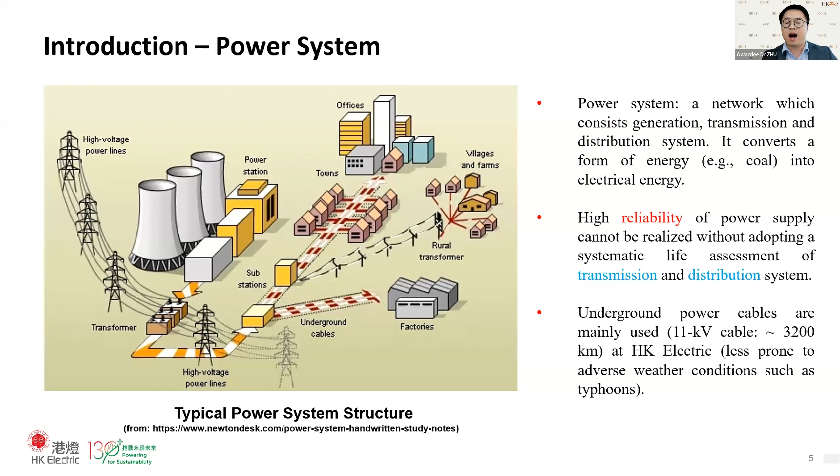So here is a summary of some defects that we observed in our underground cables. The cables may still experience tripping if defects occur. There are several defects, the following three shown here. The first one is water ingress due to poor water flow capacity. The second is water tree growth in the cable body. And the third one is, because these cables are overlaid underground together with other pipes, there can be damage.

Okay, so if there is damage, water can ingress and finally lead to a cable fault. So in order to evaluate this, there are several technologies used in this area in the power company.

Okay, so the first one is partial discharge. The principle is that when there is a dielectric breakdown of a small portion of electric insulation, together with a high voltage stress, the cable will generate partial discharge. In our system, we installed a high frequency custom current transformer to capture the signal.

The second one is the dielectric loss measurement. It measures the insulation level between the cable conductor and the sheath. If the dielectric loss increases in magnitude, the cable insulation degrades. Hong Kong Electric has used very low frequency testing to assess the cable condition for about 10 years.

The third one is very popular and easy, called insulation resistance measurement. It evaluates the insulation level between the cable sheath and the conductor. We conduct this test before cable commissioning. I recommend this one because it's very portable, using a megohmmeter, and very easy to carry. So what's the process of this measurement?

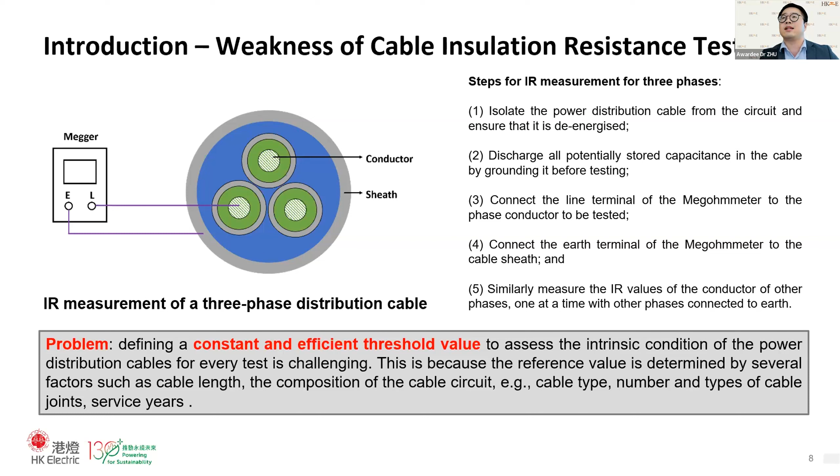So in order to tackle this problem, we propose a new concept called the IR imbalance degree, and I will introduce it in this part. First, there are some assumptions, which is why we can use the IR imbalance degree to evaluate the healthiness of the cable.

In principle, the IR measurement of three phases should be homogeneous if the cable is perfectly made and laid properly. That means the IR measurement for three phases should be identical. When a tiny defect originates, the insulation IR of that phase begins to decrease, and as the defect evolves, we can use the IR measurement of all phases to identify the healthiness of the cable.

So what's the equation for this? You can see the lower part of this slide, where we measure the average of the three-phase IR measurements. In the upper part we evaluate the deviation from one phase to the average. Suppose we have a very healthy cable and the three-phase IR measurement is balanced, so the value will be 0.

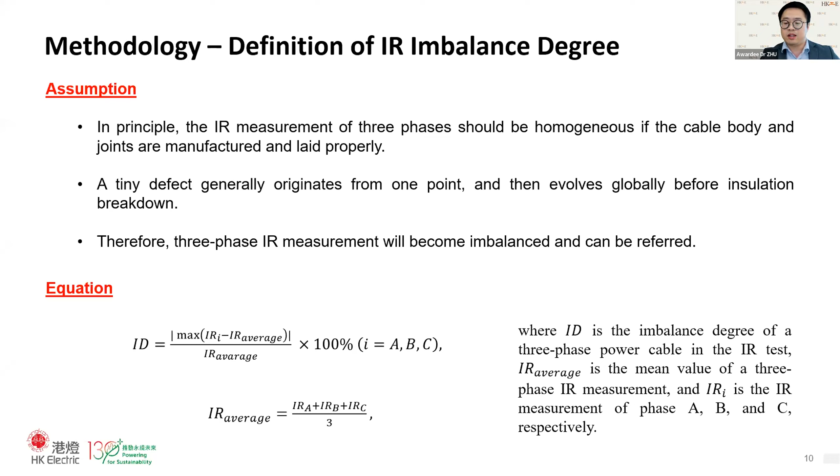So what will happen if one phase, two phases, or even all phases become degraded? Here is some mathematical derivation. In one phase, by looking at the equation, we assign different coefficients for the three phases. Supposing the three phases have a unit value and the coefficient for one phase begins to deviate, the value by calculation will reach 100%. With the same derivation, if you're interested you can look at my paper, the value actually reaches 200%.

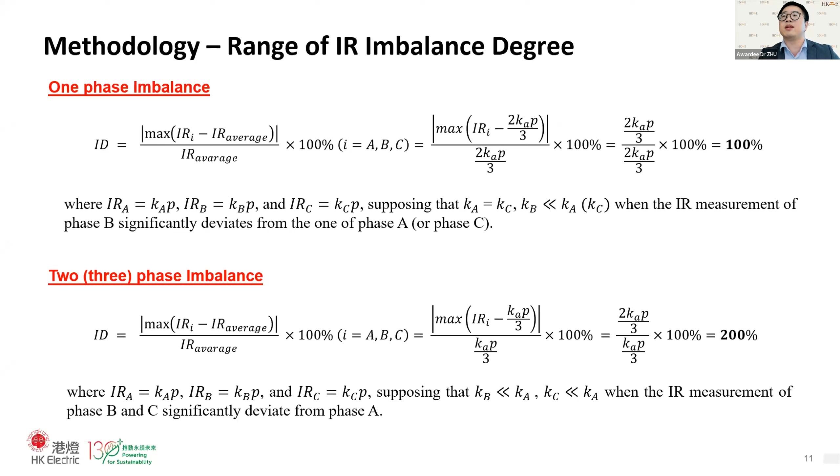So it states the cable condition — you can see the left part of my graph, which describes the IR imbalance derivation from a healthy cable to a one-phase imbalance, two-phase imbalance, and three-phase imbalance cases. So the IR imbalance value ranges from 0 to 100, and in the most serious case, to 200. This is the range of the IR imbalance degree.

In Hong Kong Electric, over the past 10 years we have about 5,700 testing records, and you can see the distribution. Most measurements are distributed under 100%, but there are rare cases locating between 100 and 200.

That is the severe case that we need to pay attention to. So actually, from this distribution, the question is how we can find the threshold of our IR imbalance degree for a cable series.

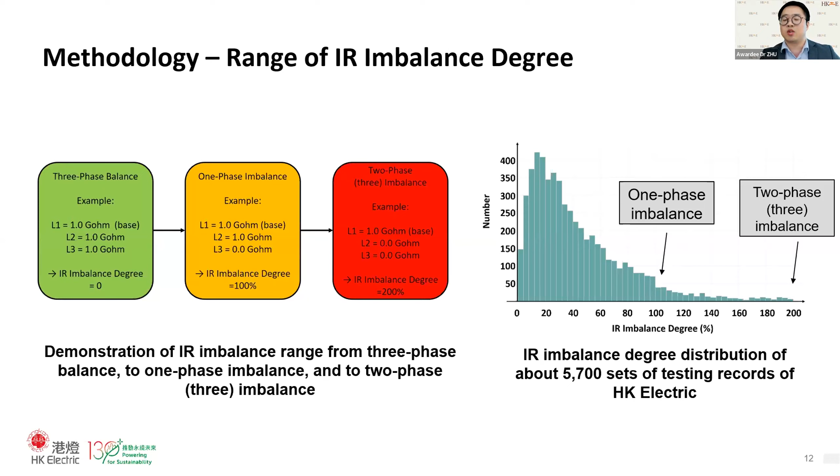Of course, you can use some mathematical method or some AI method to see the distribution of this graph. But for the easiest use of our engineers, we adopt the Pareto principle. If you are familiar with some physics, it describes that 80% of the consequences of this world are derived from 20% of the causes. So we set a very easy threshold for the criticality.

If you look at the right graph of this figure, it plots the number of tests and the distribution of an IR imbalance degree. When the cable becomes one-phase imbalanced, we need to pay serious attention. This is because phase-to-ground faults happen very frequently in our system. So we set the threshold from the deviation from 100 at 10% deviation.

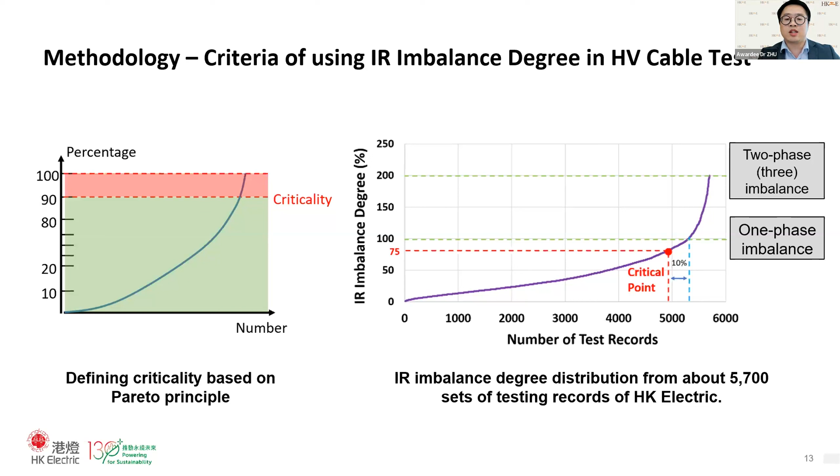We got the threshold should be 75%. Interestingly, we also look at the insulation resistance measurements, the absolute value of all the IR measurements. Because when an IR is smaller, the cable is more dangerous, we set the 10% threshold from the 0 value, and we got a threshold of 0.15 GOhm. These two criteria form a judgment on the right lower part of this slide.

So if the IR imbalance degree is larger than 75% and the IR measurement is less than 0.15 GOhm, the cable needs serious attention. If either of the two matches, the cable needs further advancement. If neither criteria is met, we don't have to take any action on the cable. So this is the criteria that we formed for the cable diagnosis in the IR measurement.

Will this method be effective? Let me give you some examples. The first one, but before that, let me give you some information about our underground cables because you may not be familiar with that. You can see there are two substations, and the cable is not overlaid strictly by a cable body directly. There can be different types of cable bodies, and there can be different numbers of cable joints.

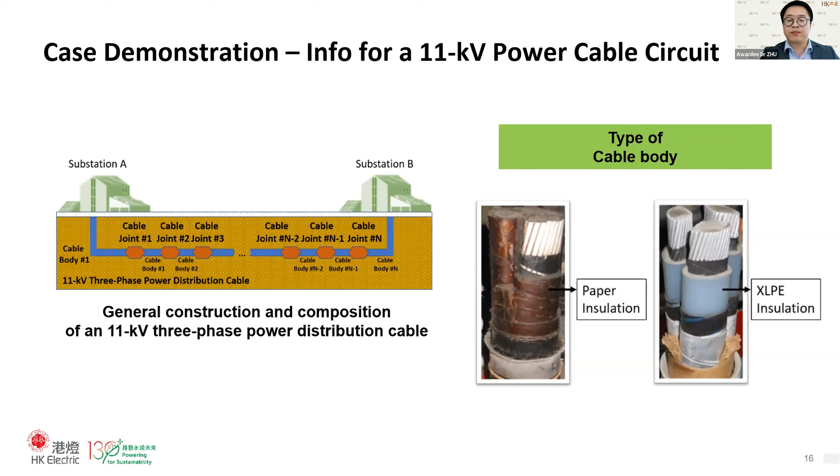This denotes that the cable needs very serious attention. So under this case, what is the follow-up action? Because the cable is very dangerous, we apply a voltage above the normal operating voltage to assess the cable situation in a prescribed manner over a set period. This is called a monitored withstand test. We apply two times the rated voltage and a 30-minute monitored withstand test on the cable.

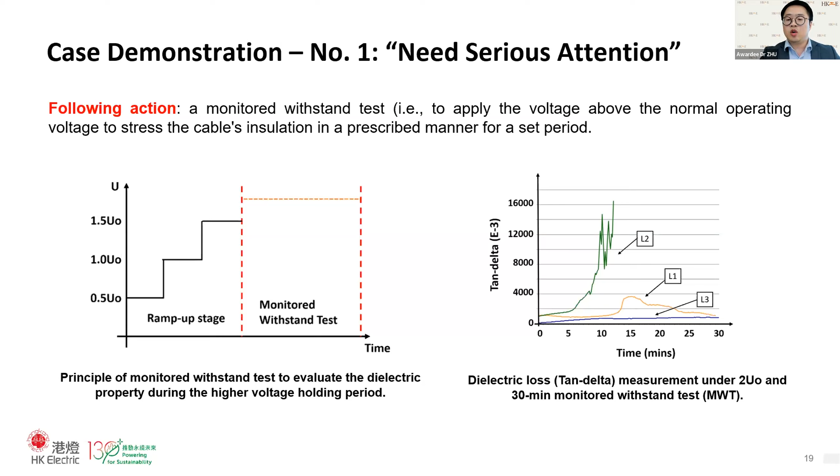We found that the cable's L2 phase failed during this test, which verifies that the cable is very weak. So we used the fault location method to explore the faults, and we returned the faulty component, finding that the cable had prolonged water ingress. From the signs observed, the outer jacket of the joint was found to be damaged on one side of the cable, which is why the IR imbalance for this cable is very weak. So this is the first case, demonstrating the effectiveness of our method in situation one.

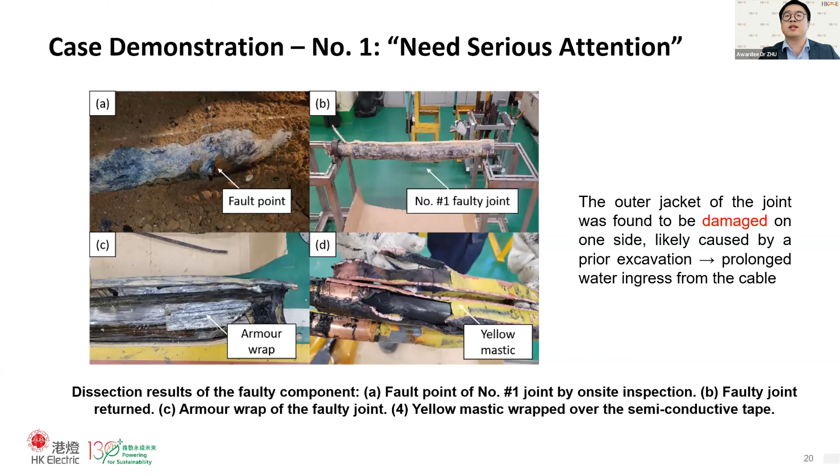And the second one, I would also like to give you, which deserves further study.

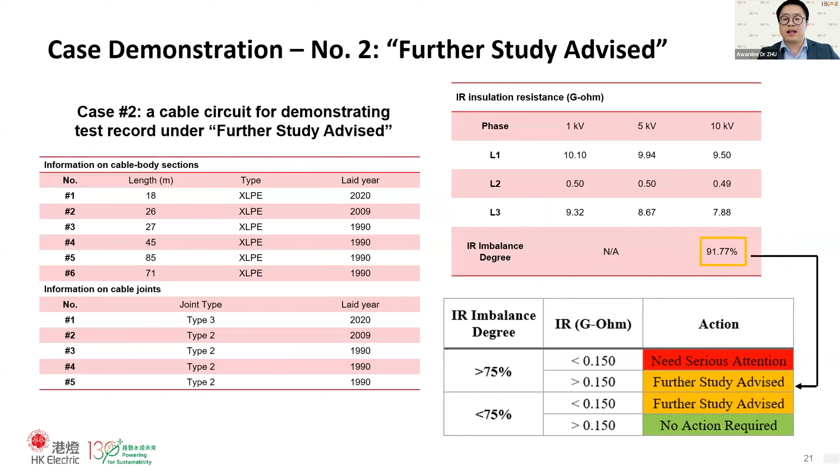So in the left part, you can see the demonstration, the setting of this cable, and also the IR imbalance on the right-hand side. The IR imbalance is actually very large, larger than 75%. By the same principle that we applied with the MWT test, the cable does not fail, so it means the cable is somewhat robust.

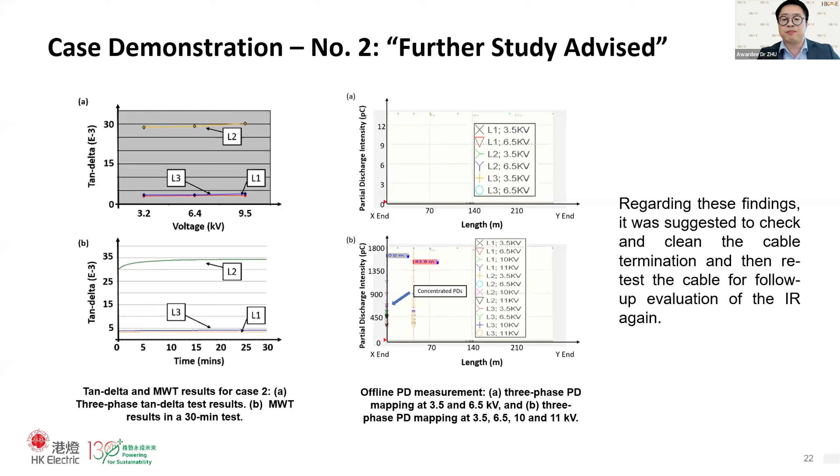But we wondered why the tan-delta measurements and the dielectric losses were imbalanced. So we also conducted a partial discharge mapping, and found at the termination of the cable that there was concentrated partial discharge. We checked and cleaned the cable termination, then did the IR imbalance again, and it became balanced. So this is the situation for the second case.

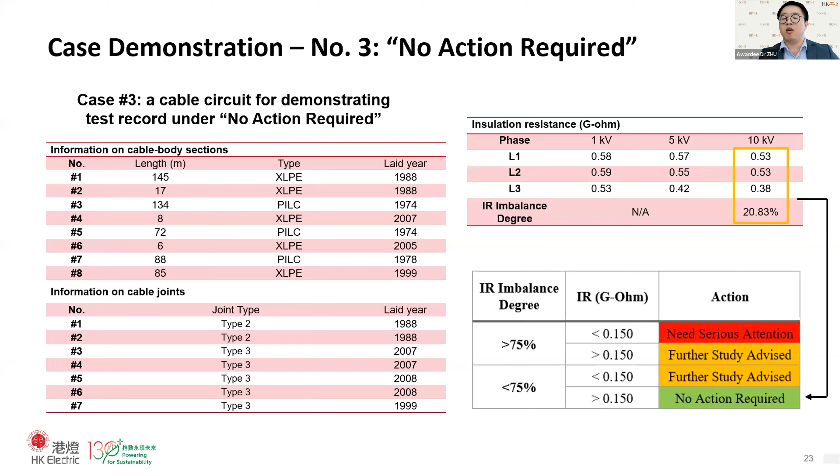So the last part is my conclusion. This paper introduced a new method for the condition assessment of medium voltage power distribution cables based on the conventional IR test, but with a new data analysis approach.

The second point is that, because there are hundreds and thousands of cables owned by our company, this measurement allows us to prioritize maintenance efforts for these cables.

The third point is that this method is not only for 11 kV power cables, but can also be applied to higher voltage cables. So this method can potentially be applied to other cables as well.

Last but not least, this improved inspection tolerance could further enhance the reliability and security of the Hong Kong electric power supply. So this is all my part, and thanks for your attention.

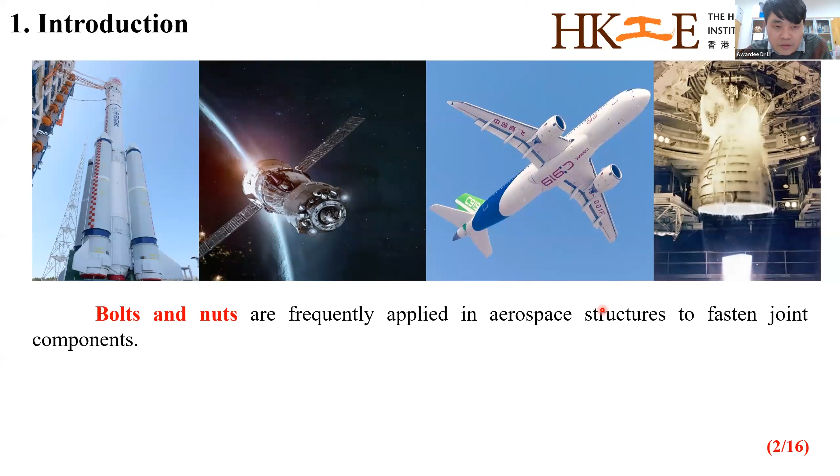As shown in the figures, for some aerospace engineering structures such as rockets, satellites, aircraft, and engines, bolts are frequently applied to fasten different components together. However, these bolted structures often encounter dynamic loads during service, such as vibration, shock, or thermal cycles, which in turn cause bolt loosening faults, affecting the smooth and normal operation of the structures. Therefore, it is very important and critical to use methods to diagnose bolt loosening faults in these structures, especially at their very initial stage.

For this objective, there are many methods based on vibration features. Today I would like to introduce the transmissibility function. According to the output responses used for the definition of TF, there are 3 main types of TF.

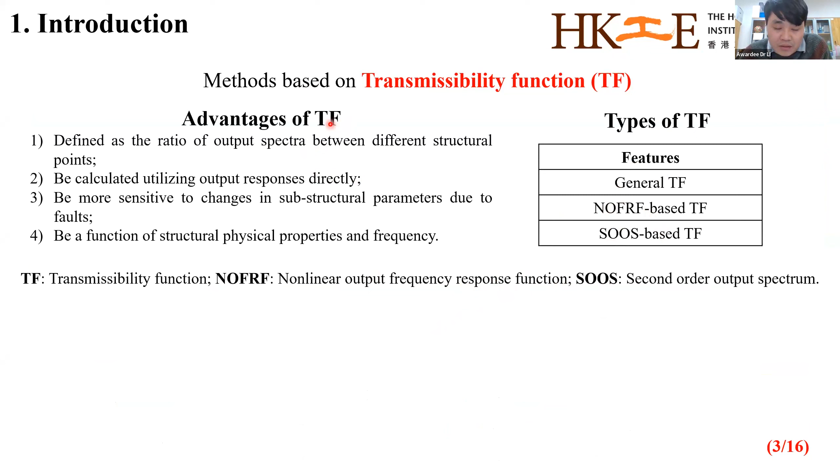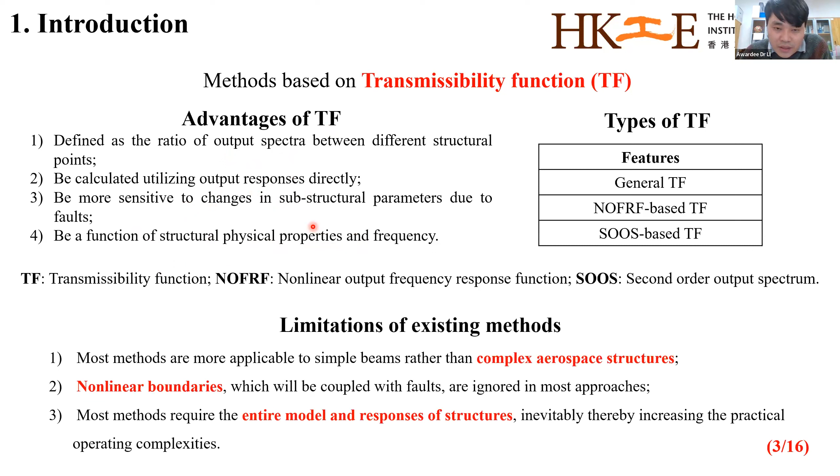Compared with other vibration features, TF has obvious advantages. Firstly, it is defined as the ratio of output spectrum, meaning there's no need to measure the input or identify model parameters. Secondly, since TF is just a function of the structural local parameters, it would be more sensitive to fault changes in structures.

However, existing methods still have some limitations. One is about the structure—most methods are more applicable to simple structures such as beam-like, frame-type, or grid-like structures, and consider little for complex aerospace structures. The second is about nonlinear boundaries, which are coupled with faults, but most methods ignore them. The last is about requiring an entire model and full data of the structure—most methods require reference data or a reference structure for damage diagnosis.

To overcome these limitations, we propose a novel method for complex aerostructures with nonlinear boundaries. We only consider the structure we care about, the structure to be diagnosed, and we don't use all the data from the whole structure. Actually, in real application, it is quite hard to know the parameters of the entire structure or to measure all output responses from the structure.

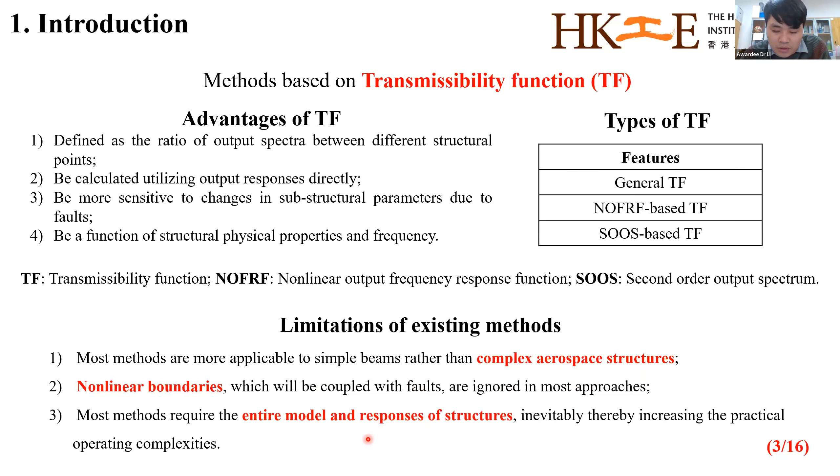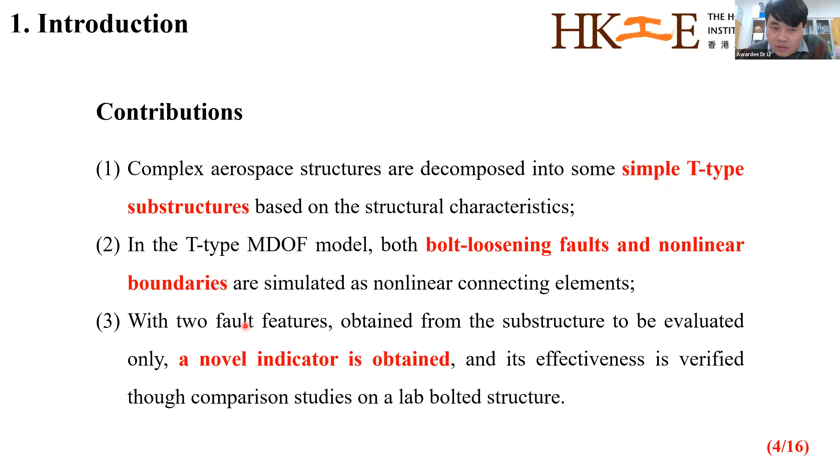In our method, we decompose the complex structures into a series of very simple T-type substructures to simplify the theoretical analysis and data processing. In the model or structure, we consider both loosening faults and nonlinear boundaries. We only use output responses from the T-type structures to be diagnosed to get two fault features and a novel indicator.

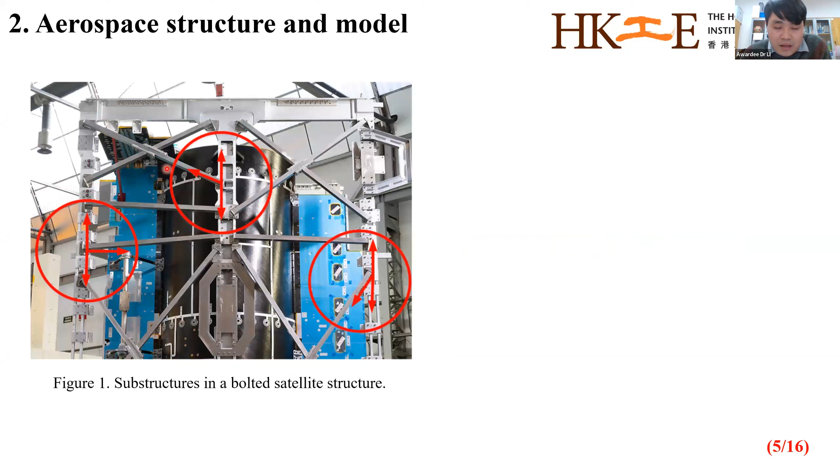As shown in the figure, it is a bolted satellite structure which is connected by some beams and bolts. As highlighted in the circle, we can find some T-type substructure, and we can also get its multi-degree of freedom model. This is the center mass, and these around mass are connected with the center mass with some spring and damper connection. In this model, we use the nonlinear connection to simulate the bolt loosening fault.

For this T-type structure, we can find many T-type structures in the entire structure, and we only consider the structure to be diagnosed. We will use these four output responses to decide whether there is a bolt loosening fault around mass mi.

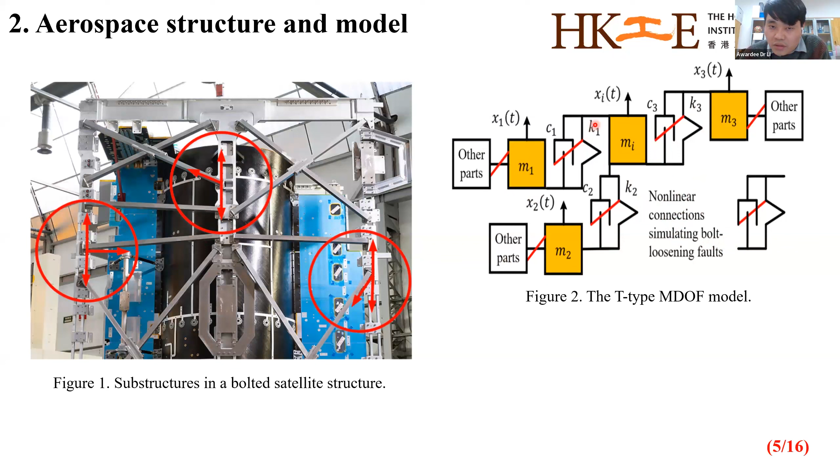Okay, then for the structure, we can get its differential equation of motion. This is the mass mi, and this is the acceleration, the velocity, and this is the displacement.

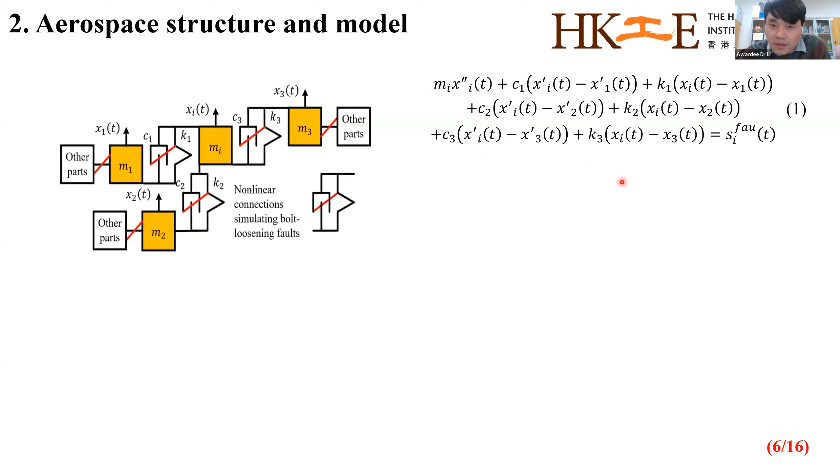C and K represent related damping and stiffness coefficients. This term represents the nonlinear force caused by bolt loosening faults in the structure. Actually, it has many forms, and we consider the common form, which is a polynomial function of related velocities and displacements. There are some explanations for some parameters.

Actually, this one is very important for our method, but we don't consider its detailed type. We consider its value. If there is no fault in the T-type substructure, then the related nonlinear force will be zero. On the contrary, if there is fault in the structure, this nonlinear force term will be non-zero. So we will use the value of the nonlinear force, zero or non-zero, to determine whether there is a fault in the substructure.

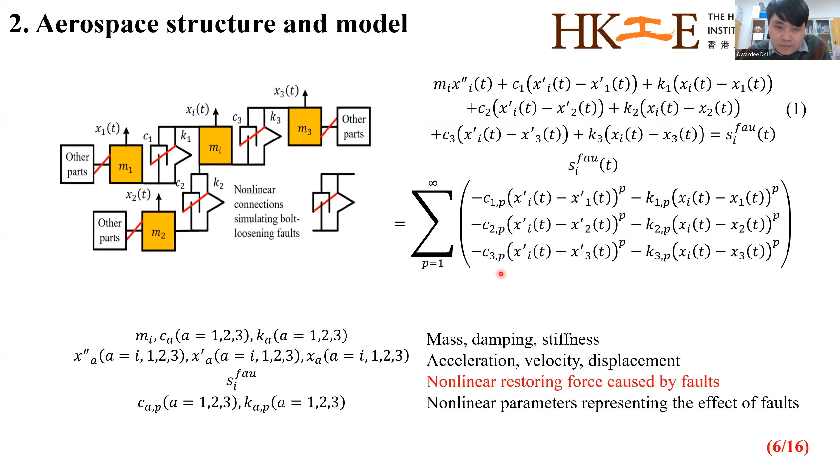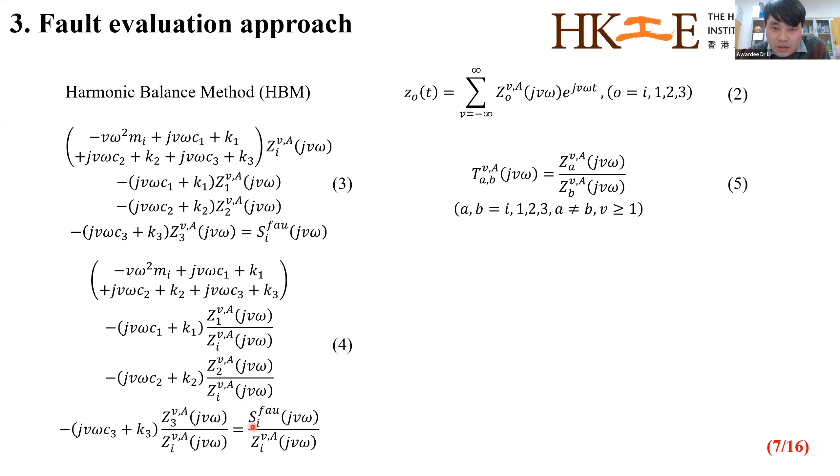Using the harmonic balance method, we can assume the nonlinear output responses of the structure and substitute these responses into the frequency domain equation of the differential equation. Then we can get the frequency domain equation, and with some operation and the definition of the transmissibility function, we can get a brand new equation.

These are structural parameters, and these are structural parameters, and these are transmissibility function. This is the nonlinear force, and this is the output spectrum.

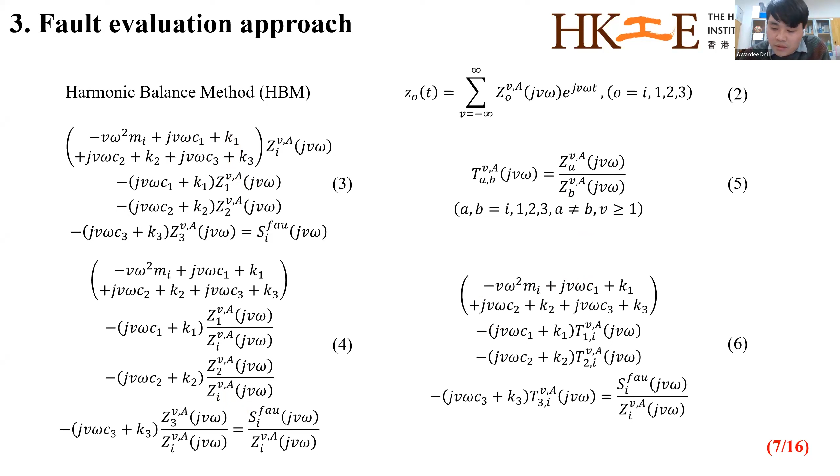Okay, we write the equation again, and then actually this equation alone cannot get the damage indicator. We found that the structure with the nonlinear boundary is a nonlinear system. So if we change the magnitude of the input excitation, then we can get...

Four equations similar to equation 6. And then if we extract three of them, we can get two groups of equations shown in equation 8. And with the inverse matrix, then we can get another equation.

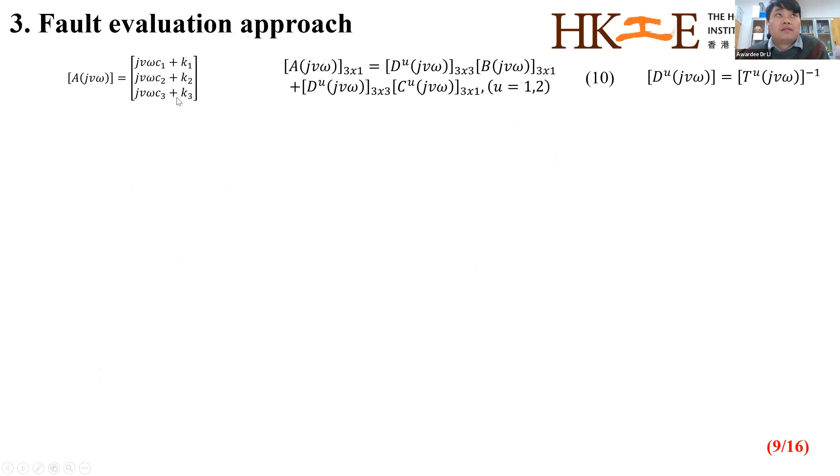And then, if u equals 1, then we can get one equation to calculate the second term and the third term. And with these two equations we will define one fault feature. Actually, this feature is defined as the ratio of these terms.

On the other hand, it can also be calculated by transmissibility functions. And similarly, if we use u equals 2, then we can get another fault feature. And with two fault features, we can get a novel damage indicator.

Okay, let's explain the basic principle. Here, if there is no fault in the structure, then related terms in these two vectors will be 0. Then the two fault features will have the same expression, which means the fault indicator will be 0. On the other hand, if there is fault in the structure, then the two fault features will have different expressions.

Then this in turn leads to a non-zero fault indicator, so we can complete the fault detection and localization based on the value of the fault indicator. On the other hand, we can find that these two fault features are calculated by these two terms. Actually, these are the elements from the matrix D, and it can be calculated from the transmissibility function matrix. This means in practical application, we can use the output responses to calculate the transmissibility function, then calculate the related elements D, and then obtain the fault features and fault indicator.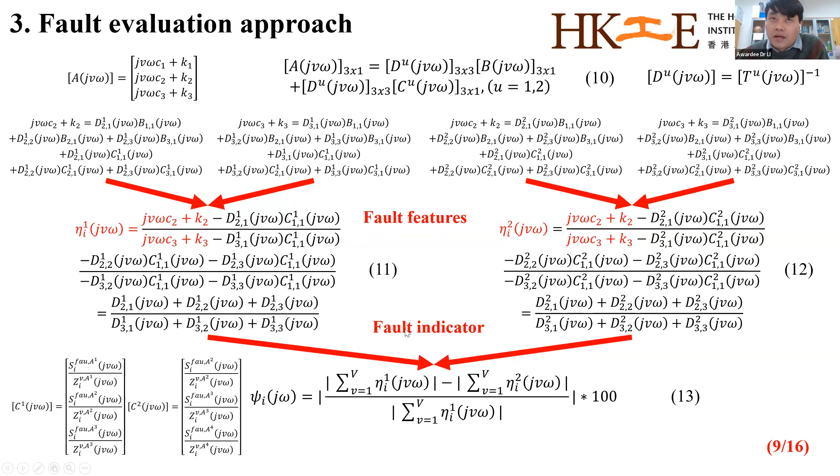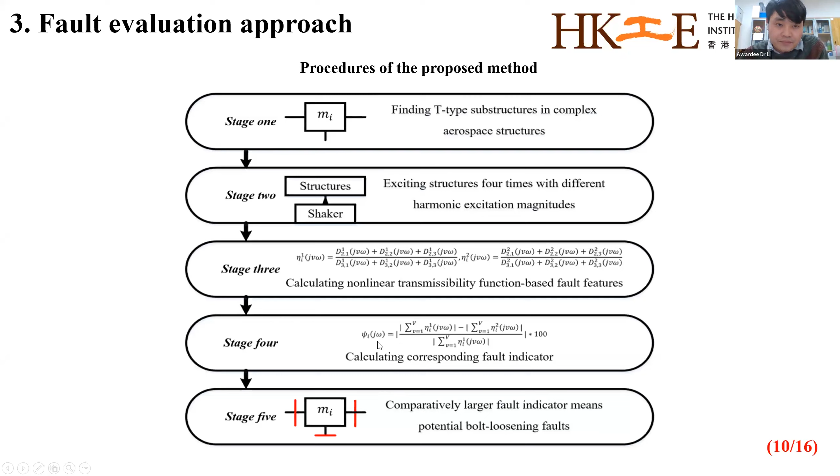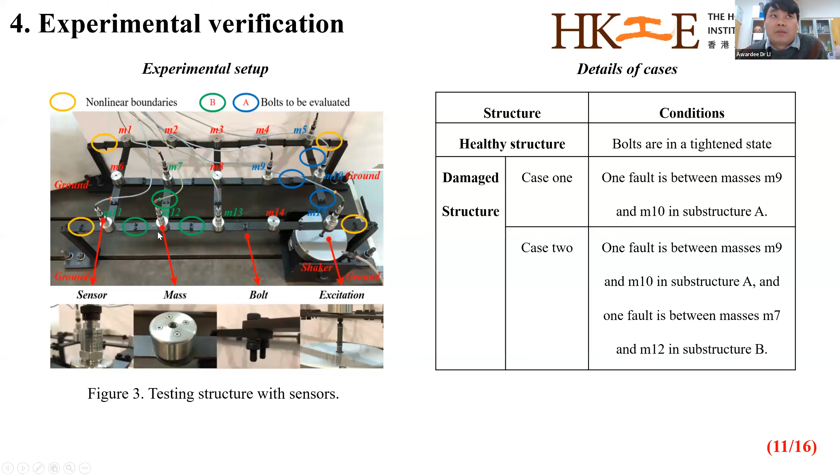In case 1, we find 2 T-type substructures in the structure, one here and one here. In case 1, there is one fault in T-type structure A, and in case 2, both T-type structures have bolts losing force. Let's check the result.

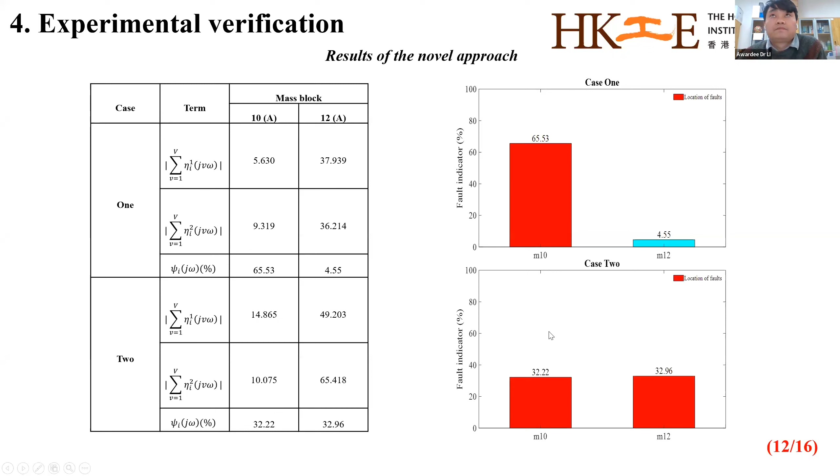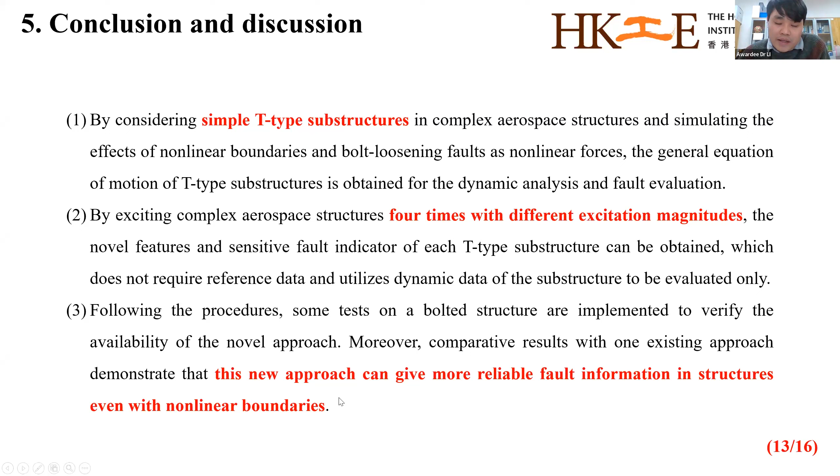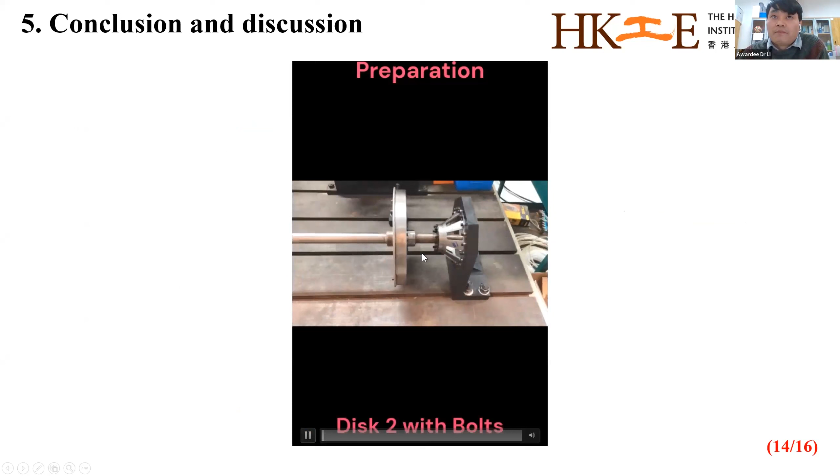For the extension of this structure, I will show you a video. This is a rotor to simulate a high pressure rotor in the aero engine, and it has one shaft and two disks.

This is the sensor, this is the support, and this is for the sensor setup.

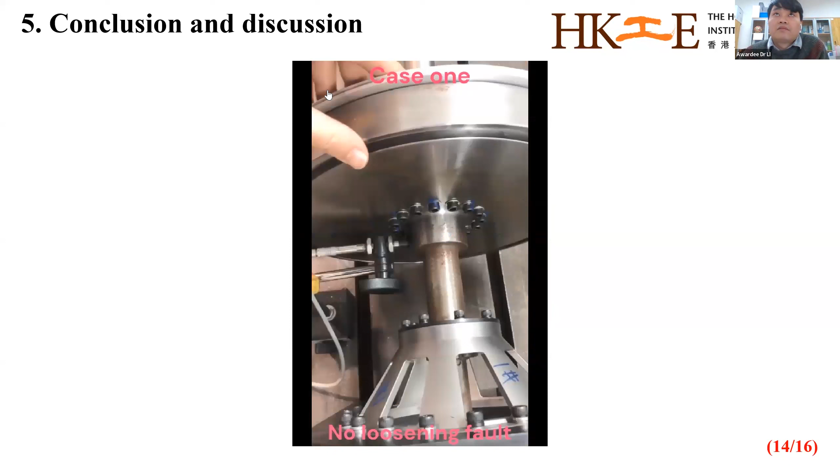In case one, there is no bolt loosening fault. Then we will collect the data for the following process.

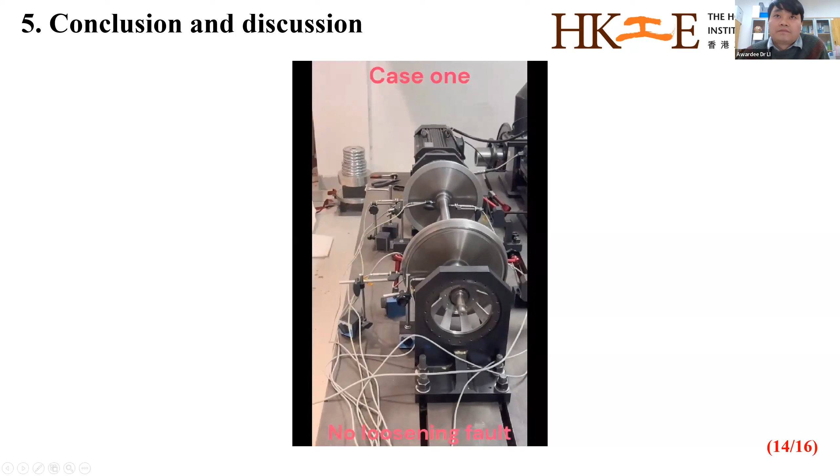In case two, this one has some bolt loosening fault. Then we will run the rotor and collect the related data.

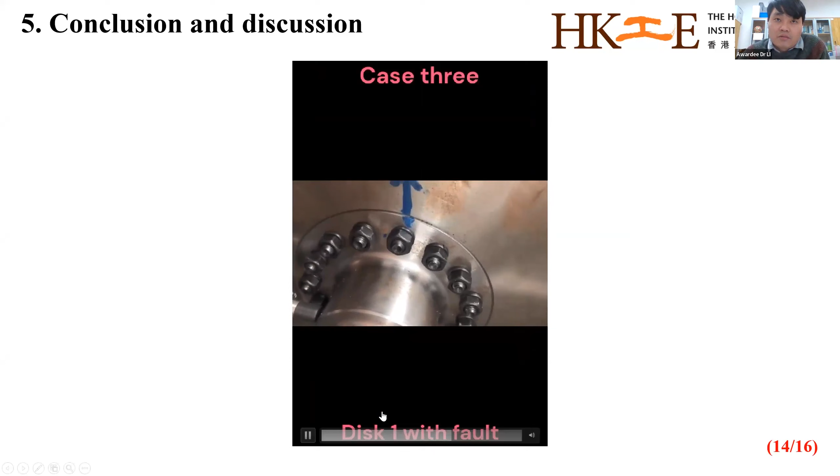In case three, we consider a more complex situation. This one has some bolt loosening fault, similar to that in case two.

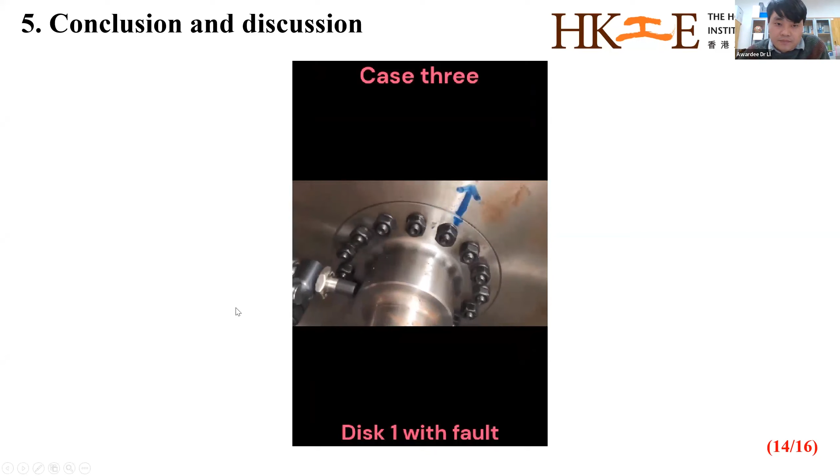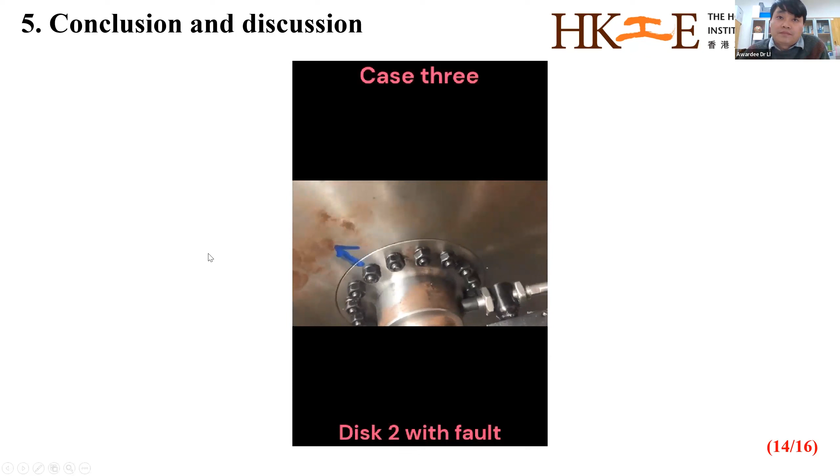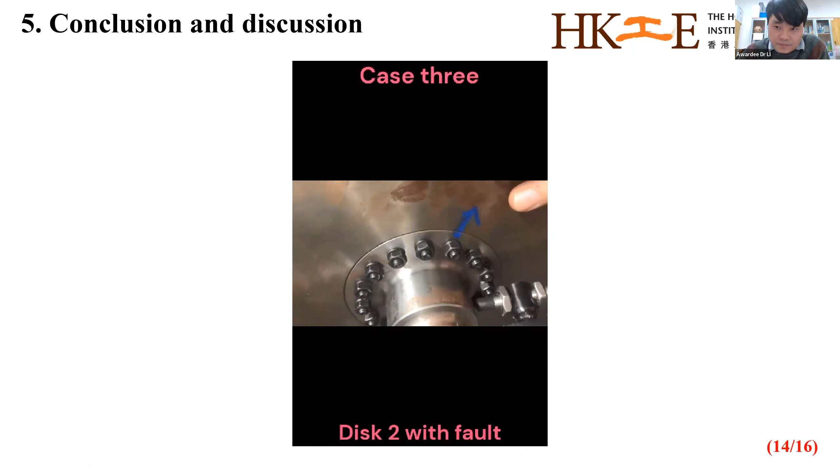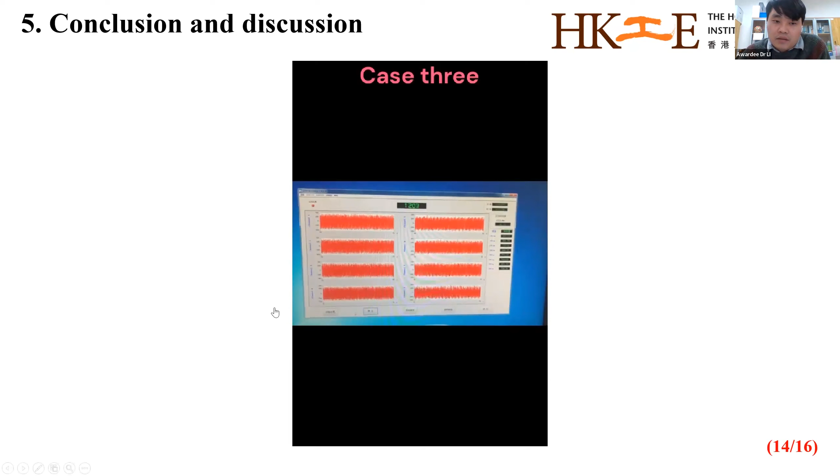Apart from that, this one also has some bolt loosening fault. We need to collect the data again and calculate the fault indicator to decide the location of the bolt loosening fault.

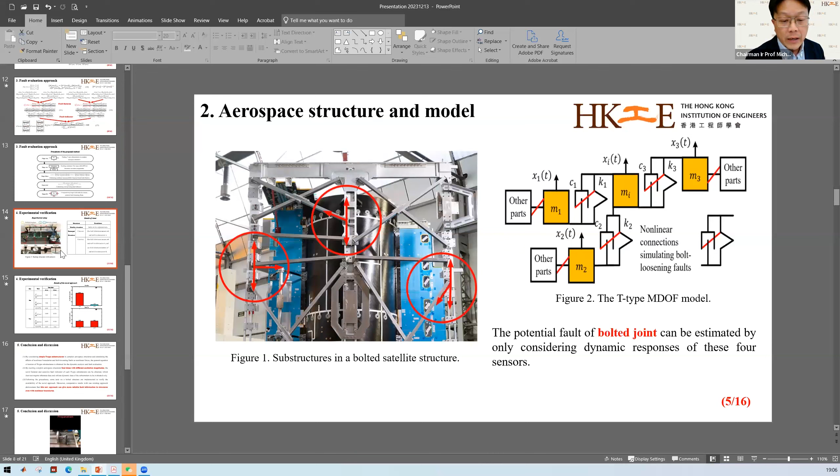Okay, maybe I have one question. In your experimental setup, you show that you test the joint, based on a rotating shaft.

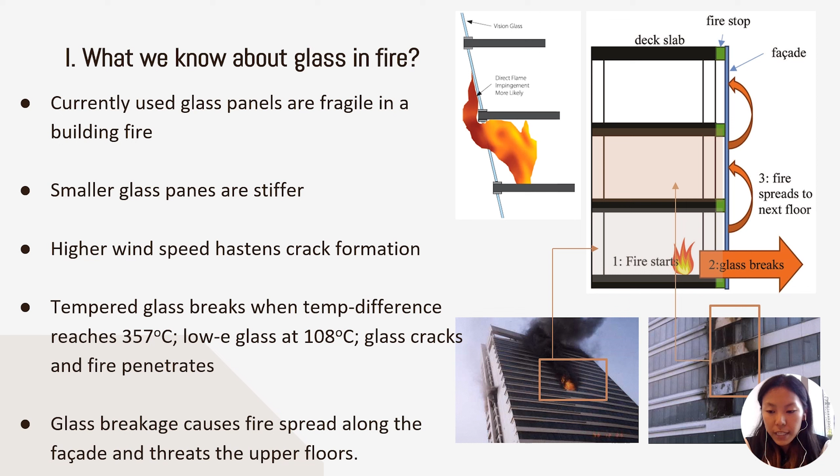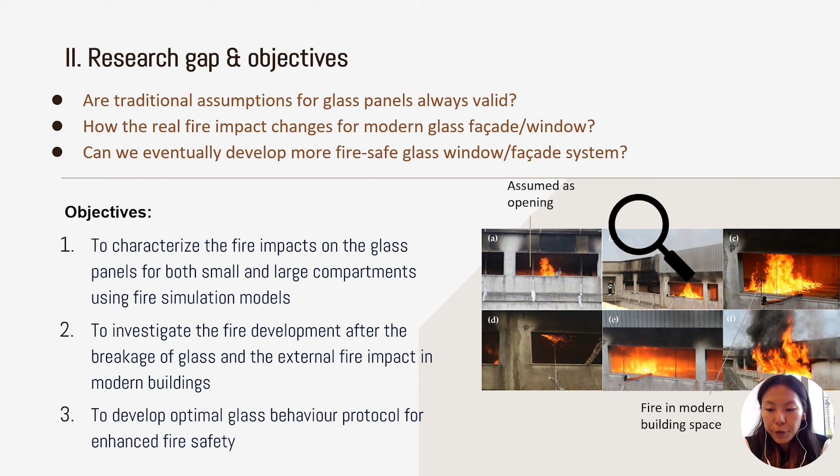In light of previous fire accidents, I would like to bring emphasis on the real fire impact imposed on glass panels and their breakage for both small and large compartments, and subsequently develop a more fireproof glass facade system to enhance fire safety.

In this research, I set up numerical simulation models on PyroSim to analyze fire behavior via FDS, which visualizes how much energy is being absorbed by the glass and smoke movement, etc.

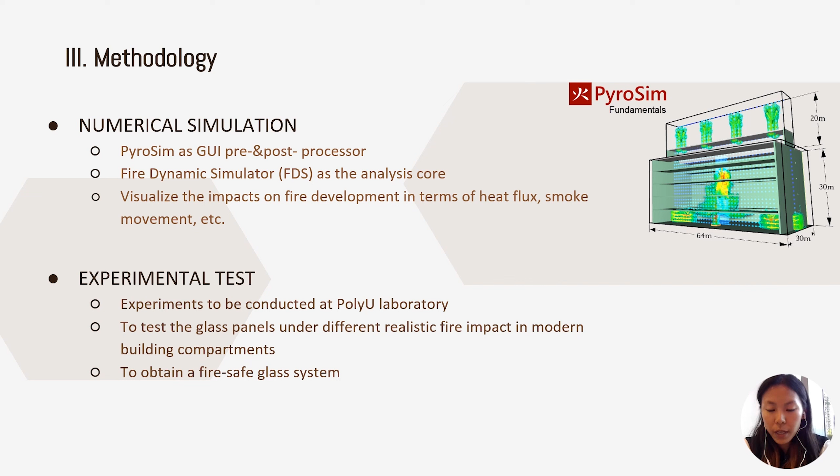Thus, experimental tests will also be conducted at the PolyU laboratory to test the glass panels under different realistic fire impacts in modern building compartments, in order to obtain a fire-safe glass system.

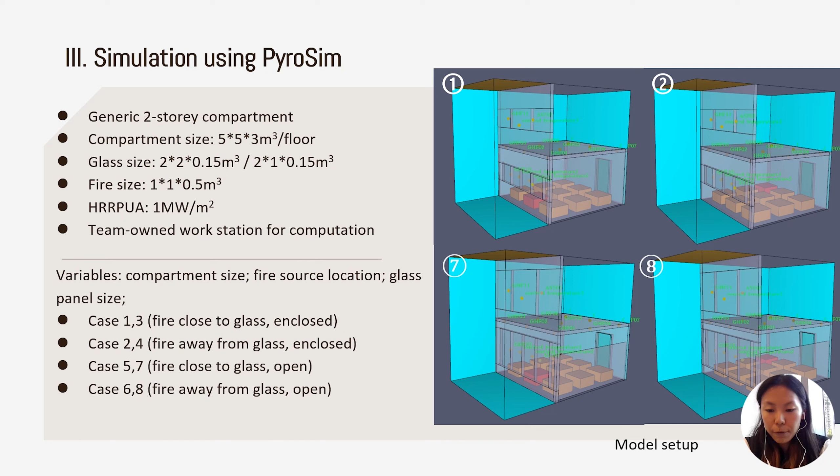I have set up a generic two-story compartment model on PyroSim at a team-owned workstation for computation at PolyU. A total of 8 scenarios of compartment fire were simulated with different compartment sizes, fire locations, and glass panel sizes, and they were arranged like the 4 models shown on the right.

Since heat is transferred from flames and hot gases to the surfaces of the glass windows via radiation and convection, in these PyroSim simulations, solid-phase devices like gauge heat flux and adiabatic surface temperature were utilized, as they take radiative heat transfer into account compared to gas-phase devices.

The diagrams on the right-hand side reflect the allocation of the devices, where the upper one shows the front view of the two-story compartment and the lower one illustrates the aerial view of the fire floor.

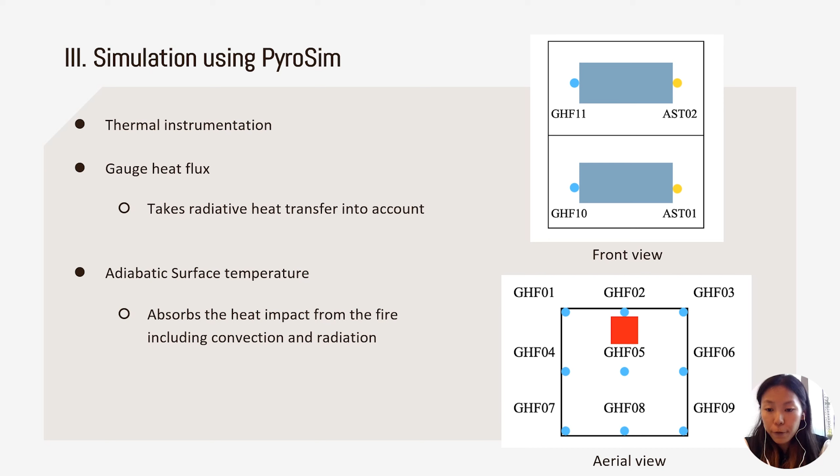Integrating the simulation results done by FDS, multiple fire tests were performed in the fire engineering laboratory at PolyU. For the experimental test, a single-story compartment made of asbestos boards was erected for thermal insulation. This rectangular compartment remains open to simulate a large compartment fire.

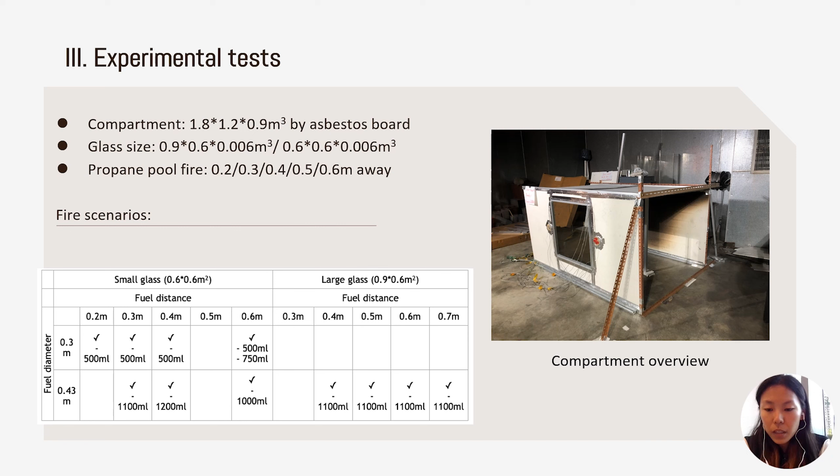As demonstrated in the photo on the right, glass varying in 2 sizes were installed on the compartment, and a propane pool fire was set at a distance to the glass. The 12 fire scenarios were listed in the table below.

For data collection, 11 K-type thermocouples were installed on the glass, and 2 thin-skin calorimeters were embedded right next to the glass. They were connected to a data logger to visualize the data collected. In addition, 2 cameras were recording both front view and side view of the fire development.

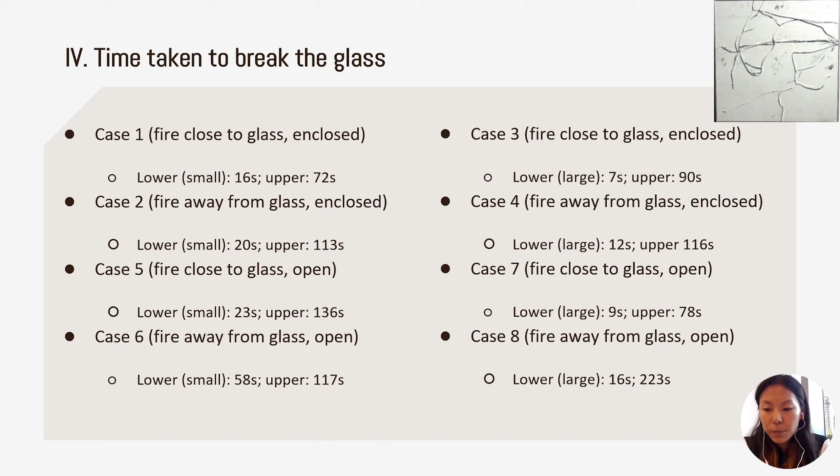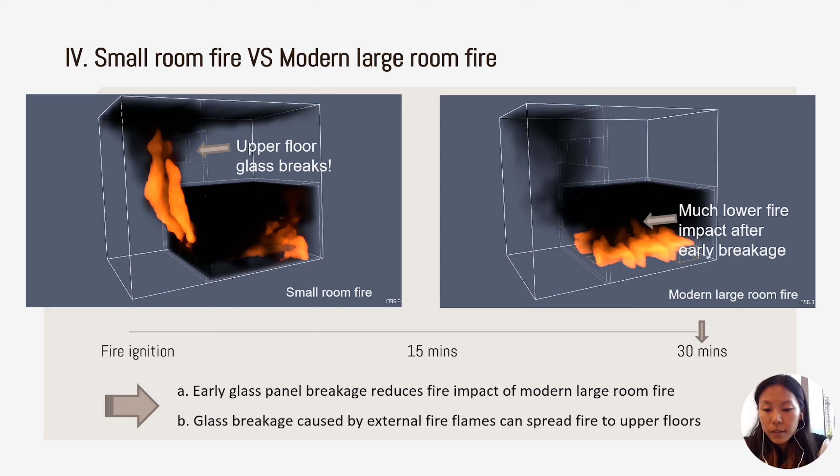In small compartments, sudden ventilation to the under-ventilated fire by an early glass breakage favors ventilation-induced flashover and brings severe fire impacts to the upper floor, just like the simulation demonstrated just now.

However, an early breakage in large compartments helps lower the fire intensity by providing ventilation to the fire. The upper large story also suffers less intense external fire impacts due to the early breakage.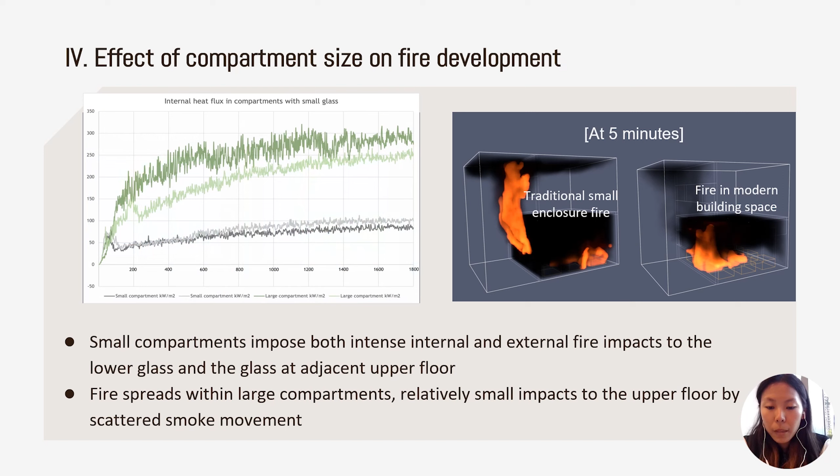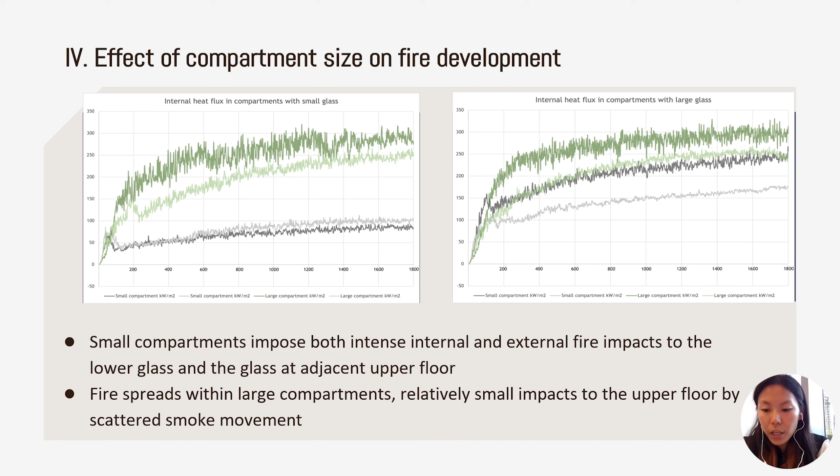The gray lines in these graphs indicate the internal fire development within small compartments. Regardless of glass size, small compartments had minor internal fire development, while fire within large compartments was vigorous. Additionally, the difference in heat flux encountered by the glasses is also small in small compartments. Along with a smaller difference in AST, we can conclude that minor heat loss is found in vertical fire in small compartment fires after glass breakage.

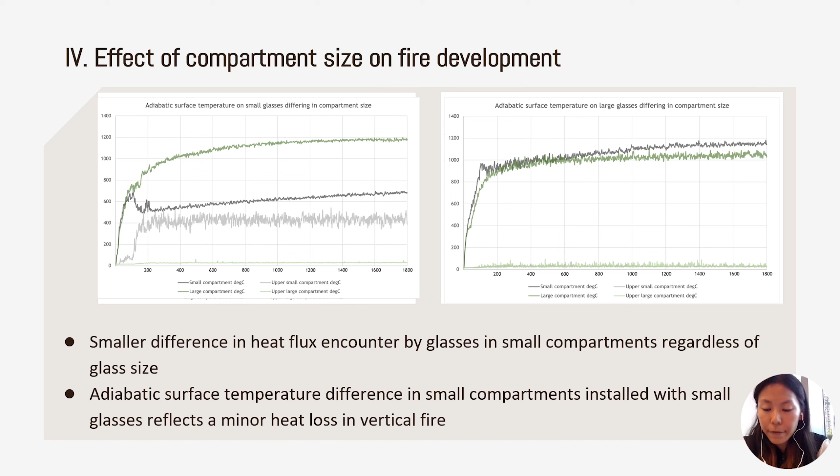The simulation also draws a distinction between glass sizes in fire development. Fire breaking out from small windows develops along the facade, while a large one drives the fire away from the building envelope. The curves also support that the heat being transferred to the upper glass was more intact due to a small glass breakage.

In the experimental test, we can observe that a closer ignition fosters glass breakage and fire blasts intermittently due to the glass cracks. As shown by the peaks in the above heat flux curves, remarkably, we can also see the effect of glass breakage in the fire development in this real fire test.

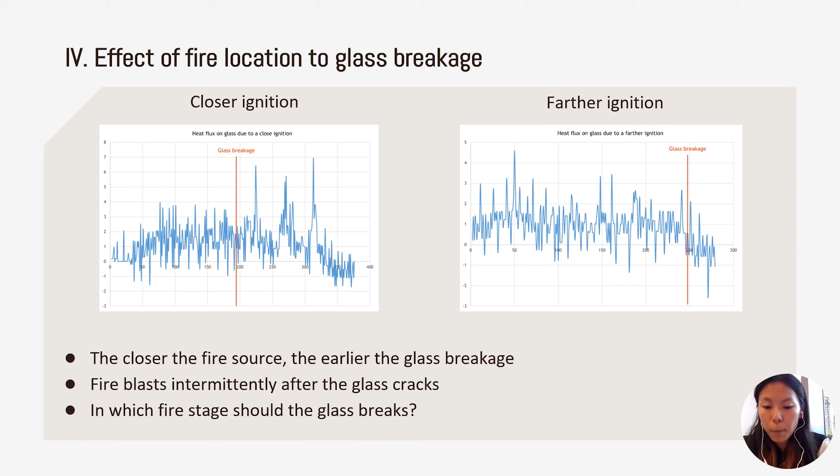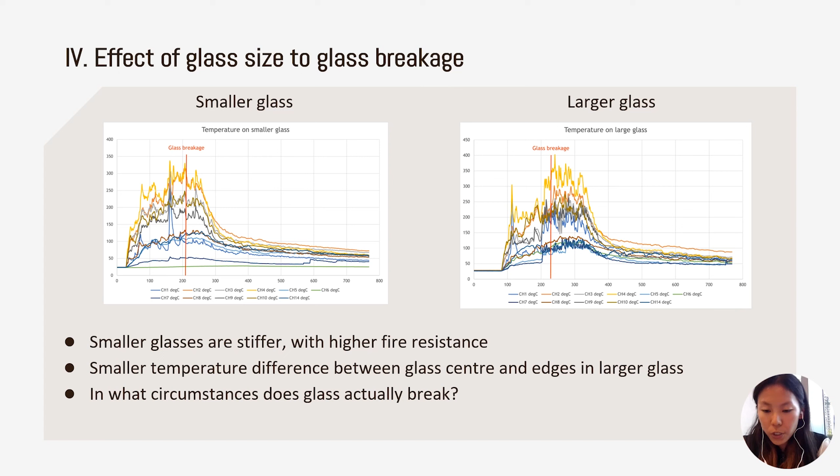Owing to the fact that smaller pane size is stiffer, its higher fire resistance postponed the breakage. However, the temperature distribution shown between the center and the edges is larger in small glasses, which challenges the former researchers. Despite glass size, fire also blasts intermittently after glass breakage.

Within my research, 3 limitations resulted. For the computational modeling, wind load was not taken into account, which should speed up the glass breakage in fires. For the experimental test, a propanol pool fire was used, which is relatively unstable and uncontrollable in direction. To stabilize the heat input, a radiant panel could be used to adjust the heat acting on the glass panels.

Radiation errors are also inevitable under the asbestos suspending environment that may cause excessive radiation, although radiation corrections have been taken into consideration with reference to the engineering models. The actual incident heat flux on glass could not be displayed in our experiments.

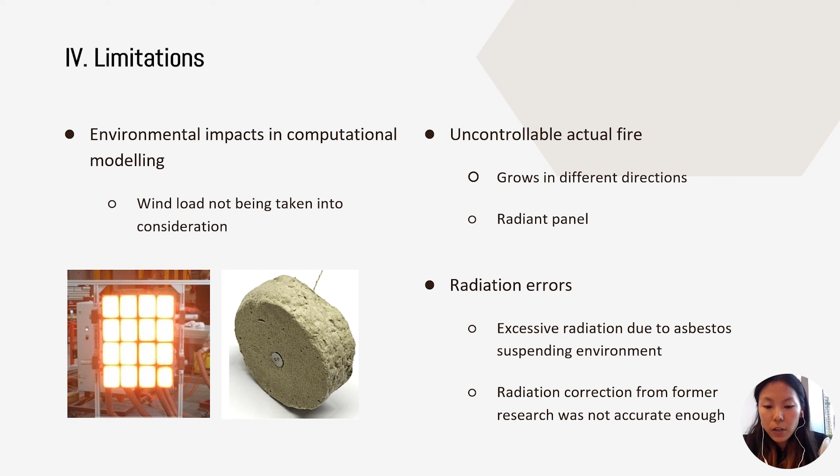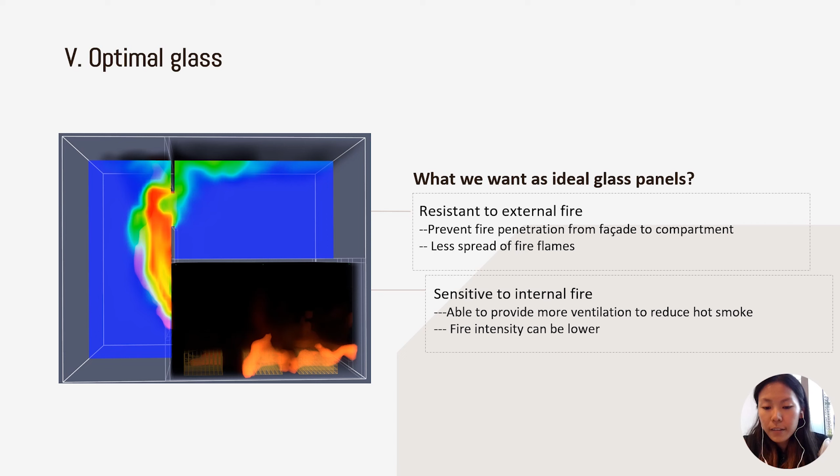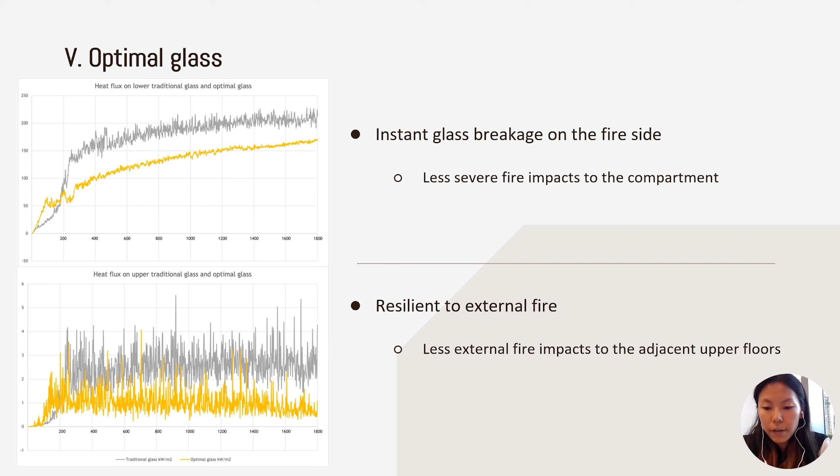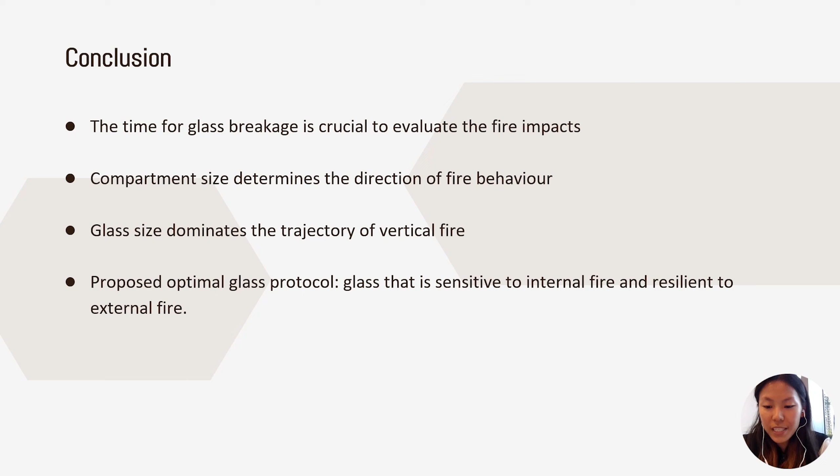Summing up my research, the time taken for the glass breakage is very crucial when evaluating the fire impacts in small or large compartments. Also, fire grows in different directions on account of compartment size. Notably, glass size dominates the trajectory of vertical fire, where fire develops along the facade after breaking out from small windows. Ultimately, an optimal glass protocol was proposed that an ideal glass should be sensitive to internal fire and resilient to external fire. This brings to an end of my presentation.